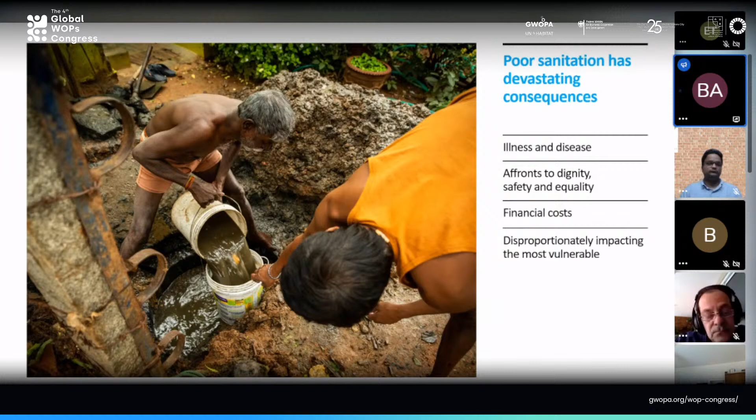So these are just some of the tips I want to share with you for us to think through, especially when we are planning. We must plan holistically. We must include all segments of society in our services, and we must ensure that we provide a service that takes care of everybody.

Again, maybe some of us have seen this. It's not just about toilets. We are talking about the sanitation service chain. We're talking about safety. For us to enjoy the outcome of urban sanitation services, safety becomes so important—safety from the point of containment up to treatment and reuse. We must ensure safety along the line. Excreta, feces, shit as we call it, should not be exposed to human beings or to the environment. That is safety. So along the service chain, we must put in systems and mechanisms to ensure that safety. That is extremely important.

Safe sanitation for all requires addressing the risks at every step, from the toilet to containment, storage and treatment, to conveyance, to treatment, to end use and disposal. Safety precautions, safety factors must be incorporated in design. I think that's extremely important.

I really want to end with my key messages because I know this is just to set the scene for discussions—I know our colleagues already have a lot of powerful slides they will show you. But if I'm to end with my slides, it's just for us to say that the world is alarmingly off track to deliver universal access to safe sanitation by 2030, and all efforts are required to accelerate progress. Poor sanitation has devastating consequences, and this impacts more on the most vulnerable population.

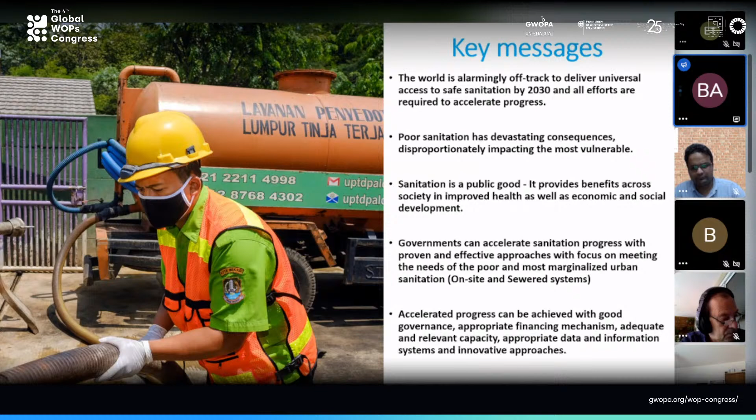Sanitation is a public good. It provides benefit across society in improved health as well as economic and social development. We believe governments have the political will to accelerate sanitation progress with proven and effective approaches which focus on meeting the needs of the poor and most marginalized urban sanitation, combining on-site and sewered systems. Accelerated progress can be achieved with good governance, appropriate financing mechanisms, adequate and relevant capacity, appropriate data and information systems, and innovative approaches. So I will end there, hopefully this will set the scene for our discussion.

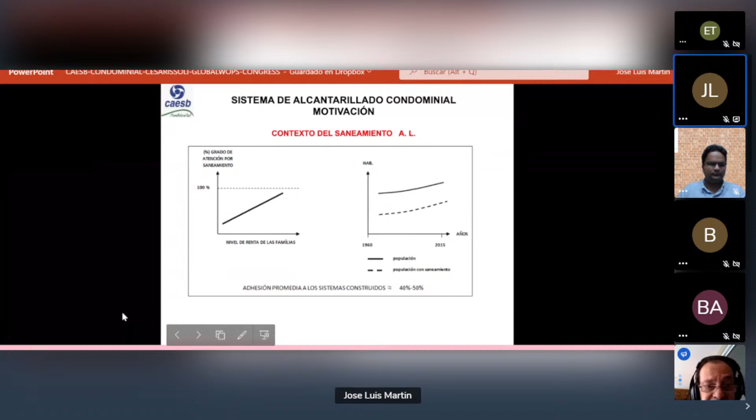Entonces, ¿cuál es el contexto de alcantarillado en América Latina? ¿Y cuál es la motivación de buscar una nueva alternativa? Aquí están gráficos esquemáticos solo para mirar la lógica de las cosas. El primer gráfico muestra el grado de atención por saneamiento en función del nivel de renta.

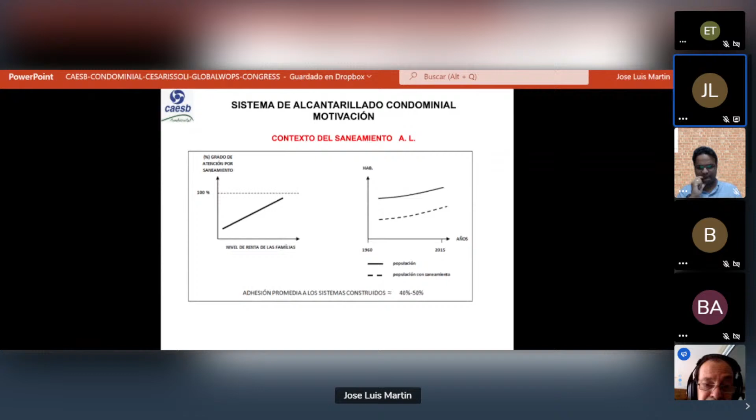Entonces, la lógica es siempre atender a los ricos, de quien hay plata. El segundo es un gráfico muy común en América Latina, por ejemplo este es de Brasil, donde las tasas de atención y de crecimiento de la población son paralelas. Nunca se logra la atención plena.

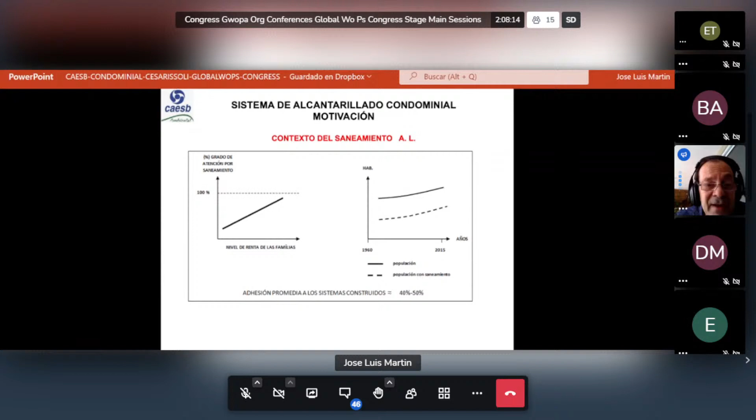Además de eso, en los sistemas implantados, solo cerca del 50% tiene conexión, adhesión de la gente. Entonces, esto es una falta de efectividad de la acción de saneamiento.

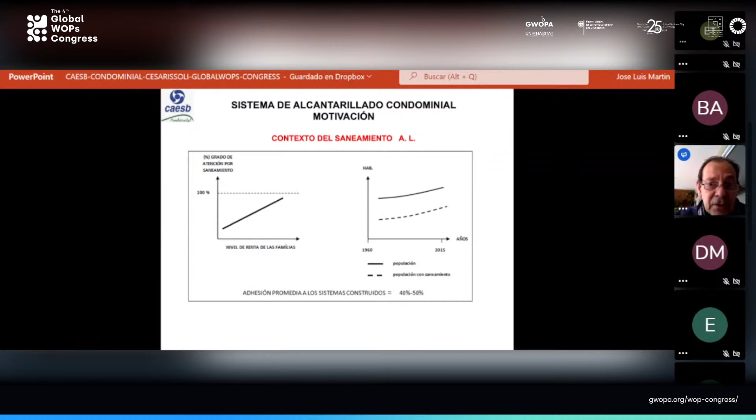¿Y cuáles son las causas? La primera es el trazado estándar de la red, que maximiza los costos, queda caro y lleva a desatención. El segundo es que no involucra a la gente.

También se tiene como consecuencia una inercia que también lleva a la no conexión. Y la tercera es la lógica de implantación, que no logra atención para los pobres, que son la mayoría en nuestros países.

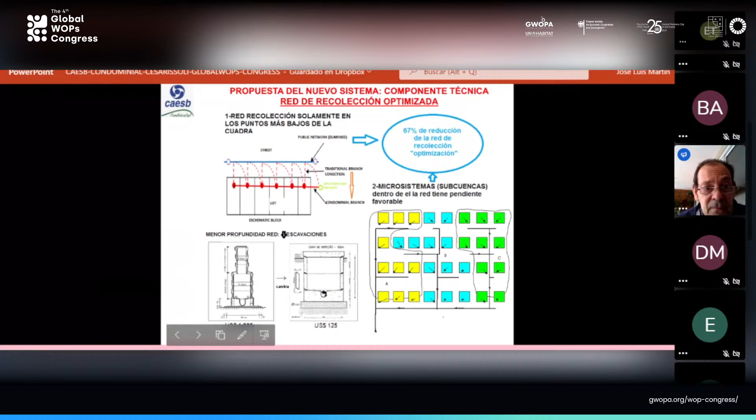Se reemplazan las conexiones hacia su vecino, no hacia el frente de la calle, sino hacia su vecino. Se transforma el conjunto de conexiones en un ramal condominial. Entonces, solo se necesita la red pública, el colector, en el punto más bajo de la manzana. Se optimiza la red, que ya no pasa por toda la calle, se reduce la red pública en 2/3, quedando solo 1/3.

Además de eso, se traslada la red pública a las aceras y áreas protegidas. Entonces se pueden cambiar los buzones grandes y caros por pequeñas cajas de paso. Así se profundiza la reducción de costos.

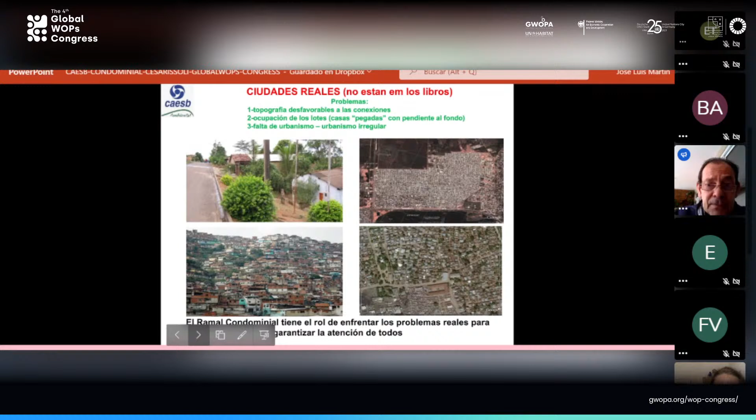Entonces, ¿cuál es el problema principal? Es la calidad de los proyectos y de la concepción. En la práctica convencional, lo que se hace normalmente es utilizar la norma técnica, la pendiente, la atención tentativa y la legislación, solo para el proyecto. Entonces, en el sistema de recolección, si no hay atención a la vivienda, el problema es de la gente. No se mira lo que existe. ¿Por qué? La legislación garantiza al proyectista que él siempre tiene la razón, aunque no mire la realidad.

En el caso del condominial, además de la norma y la legislación, miramos lo que existe, la condición de todo el sistema, la instalación existente. Entonces, aquí hay una obligación de atención a todos. Esta es una forma muy distinta de proyectar. Hay más trabajo, pero esta es la función del sistema. Toda vivienda se garantiza ahí, y hay un contacto muy fuerte, por eso, con los usuarios.

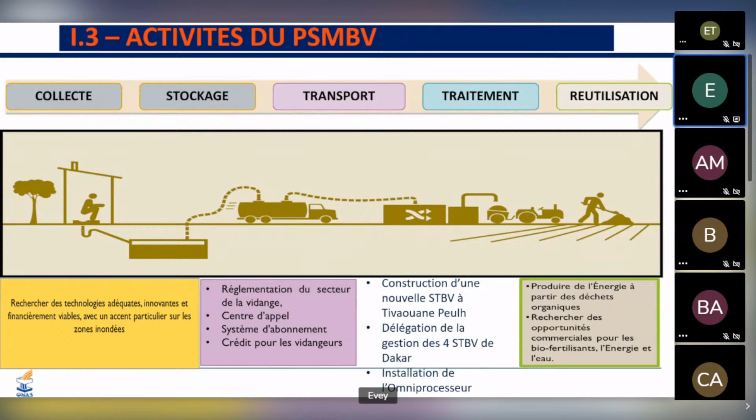Le centre d'appel a été mis en place et le bilan a été satisfaisant parce que ça a permis de baisser substantiellement le coût de la vidange.

La composante marketing, donc c'est toujours le centre d'appel qui rapproche les ménages et les vidangeurs avec la vidange mécanique.

La composante infrastructure: nous avons délégué 9 stations de traitement de vidange à Delvic, la société privée qui a gagné l'appel d'offres pour l'opérationnalisation, l'exploitation et la maintenance de ces stations.

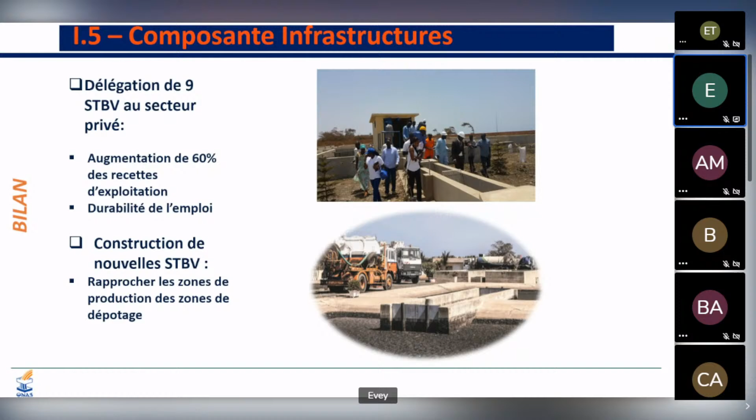Pour les toilettes dans les zones inondées et inondables, nous avons expérimenté 3 types de toilettes: le biofilcom, le biofilter et l'Earth Auger. Chaque toilette a pu donner satisfaction avec des systèmes qui permettent de traiter les boues sur place et de récupérer l'effluent dans des quartiers réputés être des zones inondables dans la banlieue de Dakar.

On a essayé de mettre en place un plan d'affaires en fournissant un paquet socio-économique de base aux populations, basé sur des toilettes, une offre incluant l'assurance santé et le bonus crédit téléphonique. Nous avons expérimenté ça.

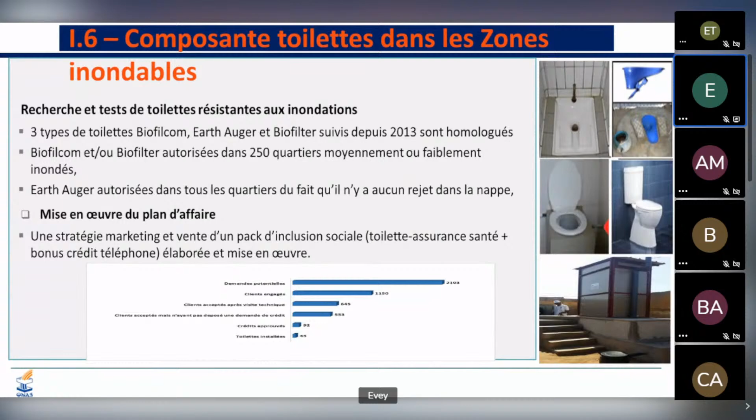Pour la composante recherche énergie, nous avons expérimenté depuis 2015, sur financement avec un don de la Fondation Gates, l'omniprocesseur version 1 qui permet d'incinérer 12,3 mètres cubes de boue de vidange par jour, de produire de l'électricité pour une puissance instantanée de 150 kW, de produire de l'eau distillée pour une quantité de 11 mètres cubes par jour, et de produire de la cendre pour une quantité d'1 tonne par jour.

Les résultats obtenus: la production d'énergie à 40%, et la production d'eau distillée comme coolant pour refroidir les moteurs de véhicules, avec un certificat de l'université Cheikh Anta Diop de Dakar.

La production de cendre utilisable à hauteur de 40% pour substituer le ciment dans la fabrication de pavés, ce qui a été certifié par l'université Cheikh Anta Diop de Dakar.

La production de cendre utilisable à hauteur de 15% pour la fabrication d'un engrais organominéral certifié par l'Institut sénégalais de recherche agricole.

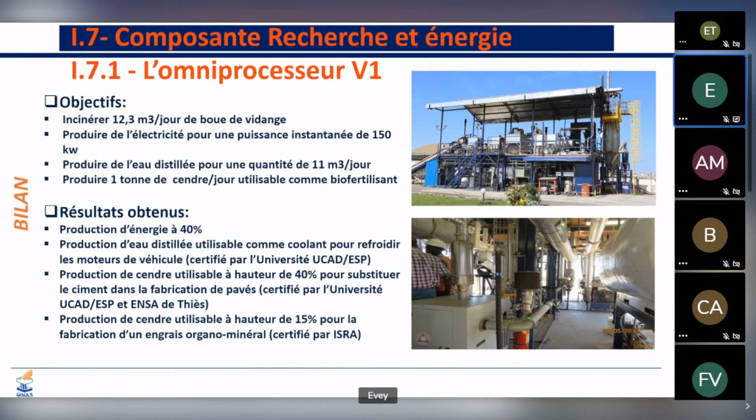L'omniprocesseur V2 est en expérimentation au niveau de la STBV à Dakar, à Tivaouane-Peulh. Il peut incinérer 3 fois plus de boue, produire 2 fois plus d'électricité, 2 fois plus d'eau distillée et 2 fois plus de cendre que l'omniprocesseur V1.

Nous avons l'omnidigesteur qui permet de transformer la boue en 25% de boue de vidange et 75% d'eau obtenue par membrane d'ultrafiltration. On élimine les germes pathogènes totalement avec cette technologie. On réduit aussi le nombre de lits de séchage, ce qui permet d'avoir un traitement intensif dans des villes où il y a des problèmes de disponibilité d'espace pour installer des lits de séchage et des STBV qui demandent beaucoup d'espace.

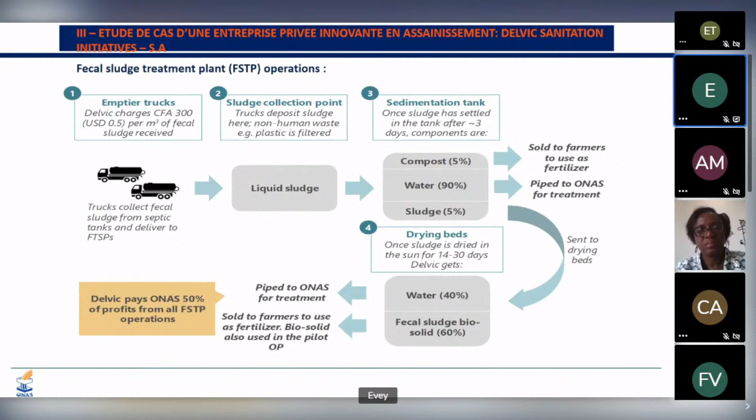Je vous remercie de votre attention. Merci beaucoup, c'est le dernier slide.

Thank you very much, Mohamedou, for that. I think a few things you've highlighted are the role the government has played through ONAS in creating an enabling environment for both the private sector and for consumers, making it easier for them to access services. That is critical when we talk about citywide inclusive sanitation.

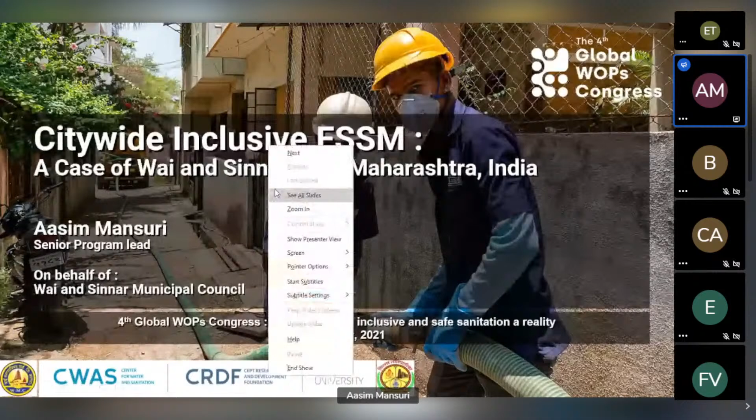Hello, everyone. Good morning, good afternoon, and good evening to one and all from the different parts of the world. Today we are going to talk about this concept of citywide inclusive sanitation, how these 2 cities, Wai and Sinnar, and to some of the questions that Gessi and Dennis raised, how cities can actually implement citywide inclusive sanitation, will be answered in this presentation.

So we are going to talk about these cities of Wai and Sinnar. This presentation I'm making on behalf of the cities. Unfortunately, they could not join, but I'm making this on behalf of them and the team that has worked, the Center for Water and Sanitation team that has worked on this project and made this happen along with the city.

The other city, Sinnar, is a fast-growing town, again on the western side of India, but a fast-growing industrial town, with a population of around 73,000. Now, the point to highlight here is that this population may sound a little smaller to all of you, in the range of 50,000 to 1 lakh population, but these cities are representative of 4,000 plus small and medium cities in India. So that's a huge number. Whatever we are able to do in these 2 cities can be replicated in India in these 4,000 cities, as well as in small and medium towns of Southeast Asia.

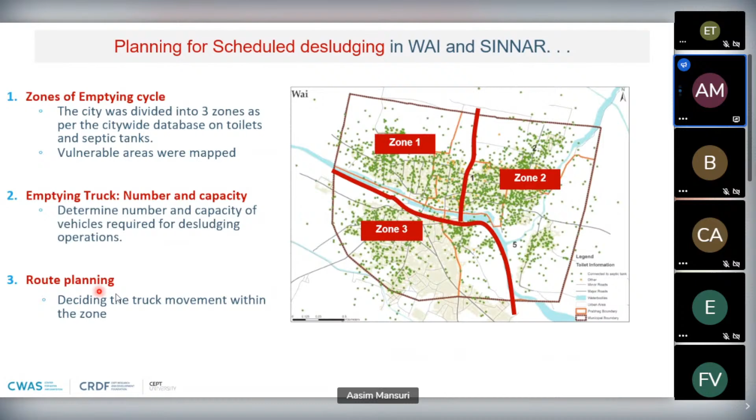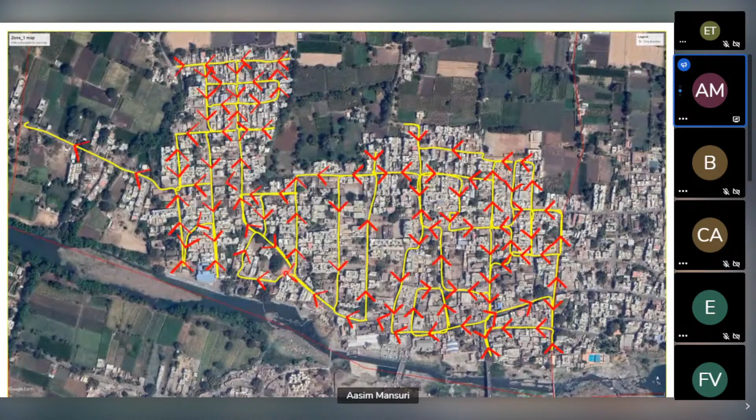This is a simple example of zone 1. Route planning was done this way for the whole city, and the private sector involved in this activity followed this route in consultation with the city government. Both cities, Wai and Sinnar, had resolved to involve the private sector, but at that time they had raised two concerns.

One concern was from the local government: they did not want to pay the private sector if they were not performing. To resolve that challenge, the city floated a performance-based annuity, performance-linked contract, wherein payment is made based on the performance of the private sector.

For example, under this contract for Wai, they had to desludge 6,000 septic tanks over 3 years, so annually around 2,000. If the private sector only desludged 70% of the tanks, they were only paid for 70% of the contract value, not the full 100%. That was from the local government side.

But there were also challenges raised by the private sector, for example, delayed payments, which is true across the world. So how do you redress that problem? This local government did, for the first time in India, an escrow agreement as part of the contract, between the local government, the private sector, and the local bank, a tripartite agreement where the local government agreed to retain 3 months of balance payment in that account to pay the private sector once bills are raised.

For example, if the private sector was to be paid $20,000 a month, this account will always have $60,000 to pay to the private sector. In that way, the delayed payment risk was resolved for the private sector.

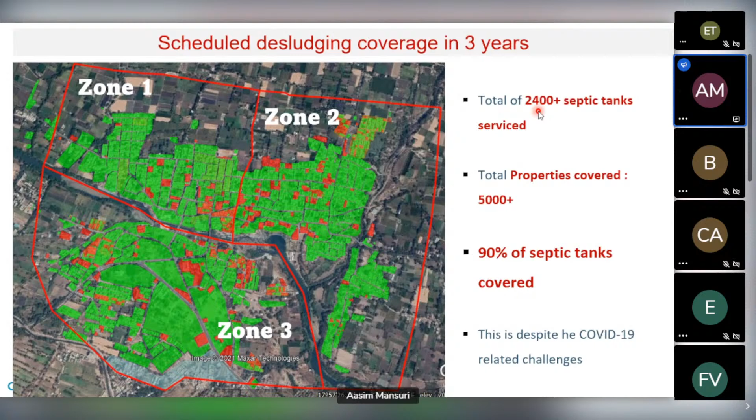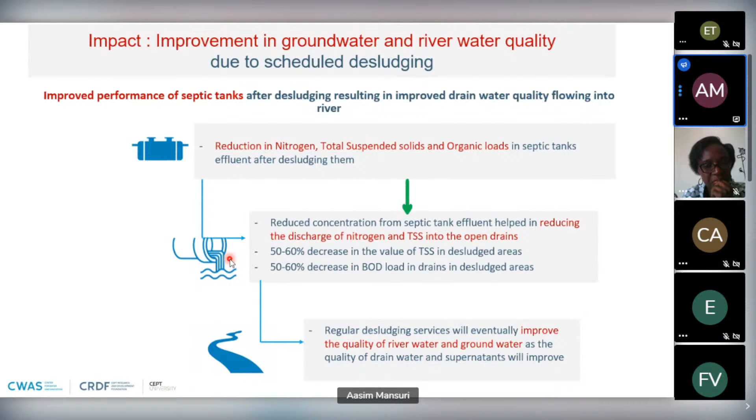Apart from the inclusivity aspect, it's important to highlight that due to scheduled desludging, there were also improvements in the ground and river water quality. As the septic tanks were being desludged more regularly, the effluent coming out of the septic tanks had better quality. It was still not the best, but better than before, as solids were not coming out. Due to this, the effluent flowing in drains and ultimately going into the river improved the quality of the river and groundwater.

There were FSTPs set up through local government funds. These FSTPs were solar powered, and all the treated wastewater from these FSTPs, as you can see in the photographs, was reused at the site for doing landscaping and urban forest. It was created as a resource center so that people can come and visit and learn about the activities the city has done.

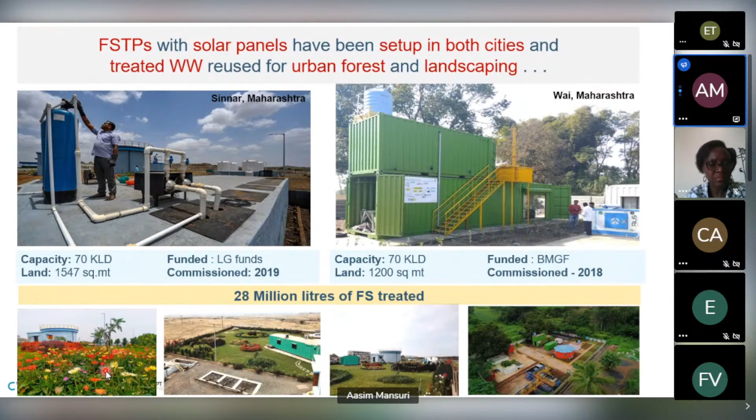Awareness generation was one of the key reasons due to which there was success, and people were able to highlight and even understand why there is a need to do scheduled desludging services.

IT-based monitoring systems like Sanitab and Sanitrack, which is like an Amazon app that we all have - once a service is provided, a signature-based app is used to monitor the end-to-end FSM services, and this is being monitored through dashboards. It also monitors whether slum households have been covered through these mechanisms and scheduled services. Very important, when we talk about inclusivity, it's about taking everyone together.

We saw a very potential role of engaging with women for providing this FSM service delivery. Along with the local government in Maharashtra, the state where we work, there is 50% representation of women in the elected bodies. So we did capacity building workshops with them to build their capacity on FSM.

We celebrated women champions, sensitizing women at households, because when the desludging service was being provided, there were women at home, and we built their capacities along with the city to make them understand the need for desludging services. This resource, the FSTP Resource Center in Sinnar, where the treated wastewater is used, is managed by the self-help women's group in these cities. This is the way we engage with women.

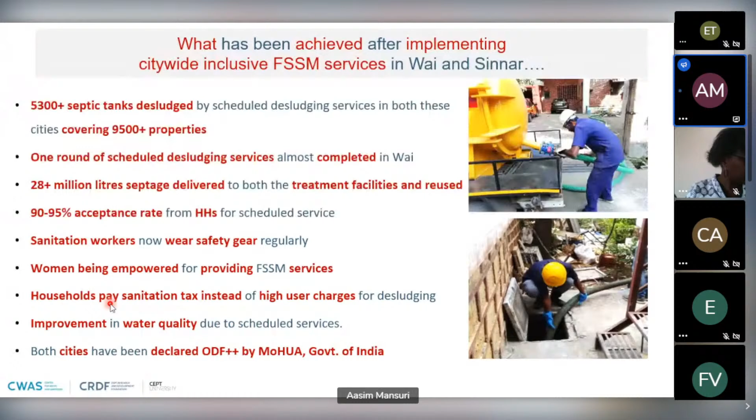Just to conclude, what the city has been able to attain as a public service: 5,300 septic tanks have been desludged in those towns. 28 million liters of septage has been treated, with a 90-95% acceptance rate for scheduled services. Women are being empowered, and households are now paying a sanitation tax as part of property tax to get this service once every 3 years. Both cities have sustained the status of ODF++, which is one of the certifications as per the Government of India.

It's important that we do pilots and then scale this up, as that has been our experience. We have been scaling up these learnings at Maharashtra level, working through policies and guidelines, as well as at national level, and tools have been prepared so they can be widely used by other cities in India as well as other countries.

Last but not least, it's important to acknowledge that this has only happened due to partnerships and collaboration. We are thankful to our funders, the Bill and Melinda Gates Foundation and HSBC, as well as our city and state partners, the local government and state government, and the NFSSM Alliance, an alliance of 30 sector partners working at national level to scale up fecal sludge and septage management in India. We'd like to thank all of them.

Thanks. And if anyone has any queries or wants to visit our website, most of these materials are available there, or you can write to us. Thank you. Thank you very much, Asim.

I do apologize for moving you quickly, but we do want to bring in the other two presentations, so please hold your questions for Asim, we will have a discussion in the plenary. We are going to move from the utility level, telling us about the sanitation value chain and how it is perceived by people working in that space, and move to the WOP.

How can we build the capacity to meet the sanitation challenge through peer-to-peer learning? We have two guests, and we will start with Mohammed Homeidan.

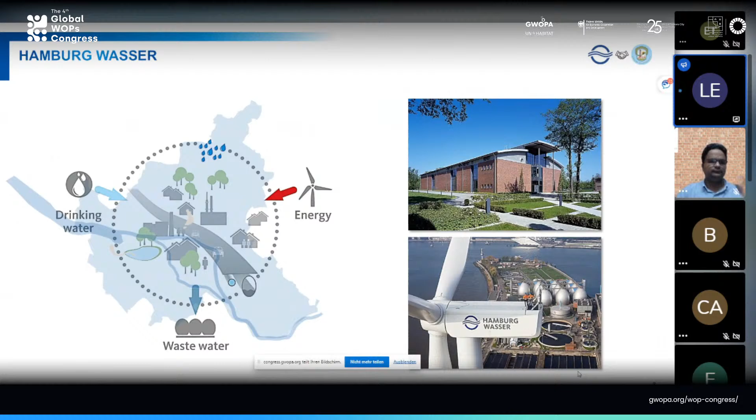So we do fermentation of our wastewater sludge, and that is what Mohammed and his colleagues in Nablus are also doing. We are generating energy from the sludge, and we are fully energy autarkic - we don't need any energy from outside. The wastewater treatment plant produces the energy it needs.

Hamburg Wasser also has a small project of decentral wastewater treatment, a separation of the wastewater streams. We have vacuum toilets, and a decentral treatment of the wastewater, and we also make biogas from it in a combined heat and power plant. We use the energy to produce heating. And with this, I already hand over to Mohammed.

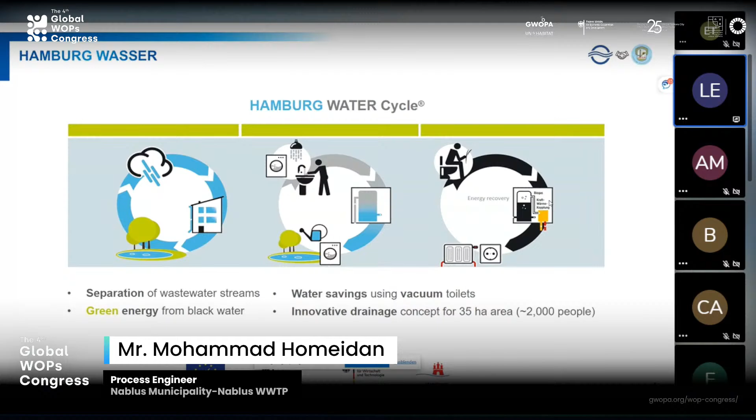Thank you, Lucatina. Thank you, Barbara, for the introduction. I'm really happy to be here in this session. From Hamburg Wasser, from the big plant in Hamburg, to the small plant in Nablus, which is really doing very well in treatment performance. Now we are talking about Nablus wastewater treatment plant, and in the future we will have Nablus East - these depend on the catchment of Nablus city.

And in the years of operation, it has improved to have a CHP plant. What I want to say here is that it was one of the challenges, really, in Nablus and in Palestine, that we have the first anaerobic digester.

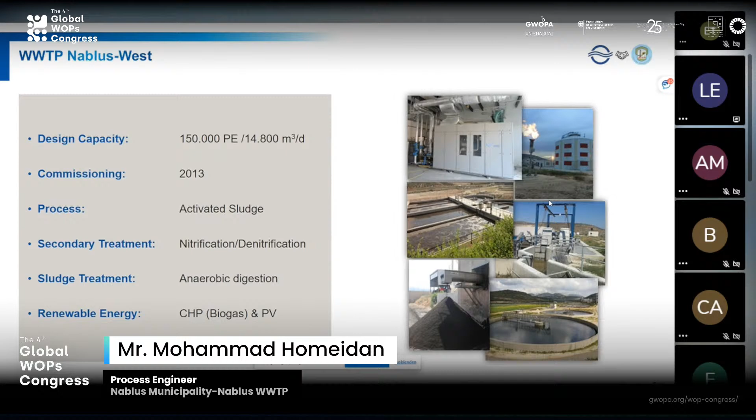I was remembering all the negotiations during the design phase about whether we, as the operator in Nablus city and in Palestine, could handle the operation of an anaerobic digester. At that time it was an issue. But now we have the first anaerobic digester in Palestine, in West Bank and Gaza, and it is well operated.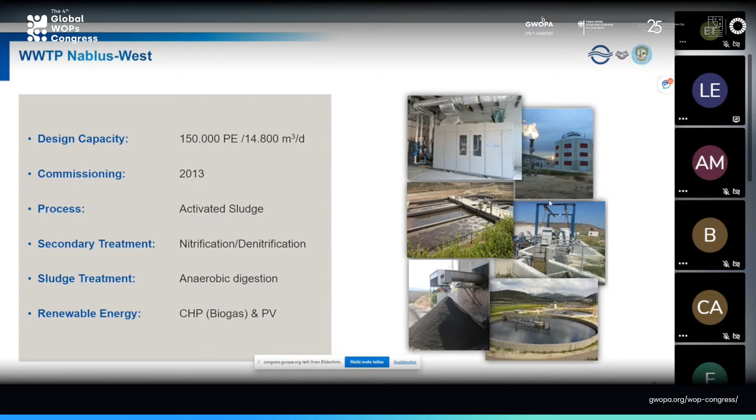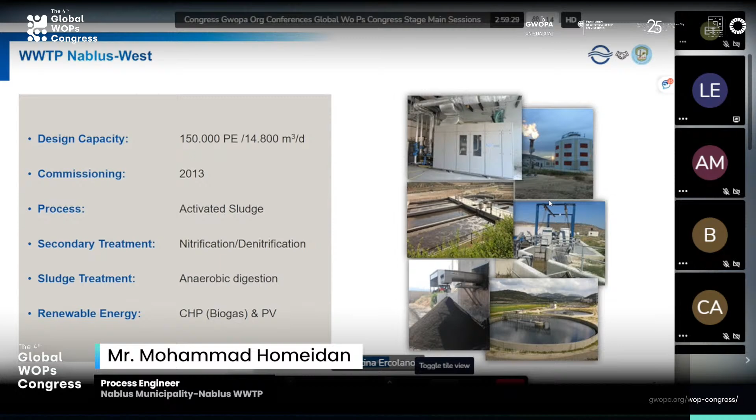In this slide we can see some pictures from the treatment plant. It depicts the effluent water on the right hand side, the PV panels, and also the anaerobic digester, which I talked about, in the middle picture.

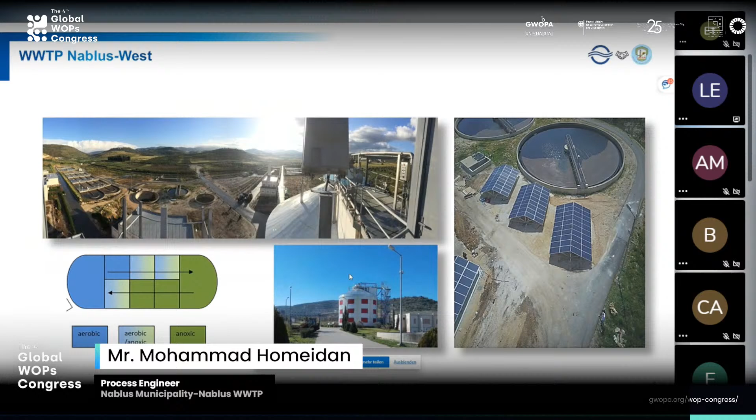Now with Luca. Luca? Lucatina, are you there? Thank you very much, Mohammed. Can you hear me? Yes, we can.

Thank you, sorry. I'll start with some facts of our cooperation. We already started working together during 2013. So when this beautiful plant in Nablus West was commissioned, some experienced people from Hamburg came to live in Nablus for a longer time. They were permanently on site and assisted Mohammed and his colleagues to make a very good commissioning and to take over the plant from the manufacturer that built it.

There were also short-term missions from other people in Hamburg. For example, we have experienced electricians who know about the SCADA system, and they came for maybe 2 or 3 weeks to help in a certain area.

What was really nice is that the colleagues from Nablus came to Hamburg for several weeks to stay with us. It's always been a pleasure to have you here, and the people from Nablus could experience how it's done in Hamburg, and we also came to Nablus to see how it's done there.

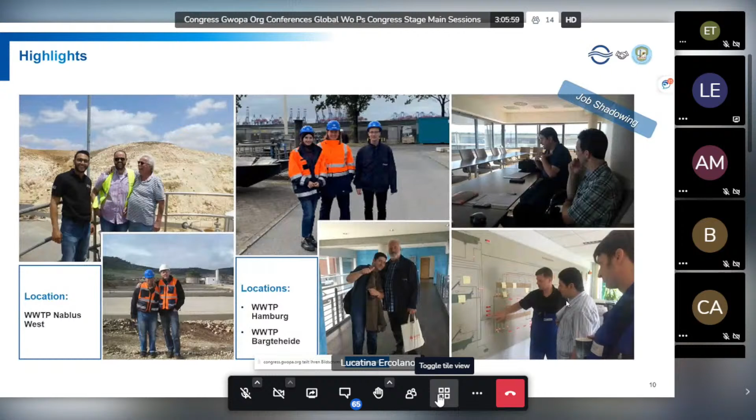Here we have some pictures of memories between us and Hamburg Wasser and Consulaqua. I would like to appoint the left picture for our expert, Karsten Schuya. He passed away 3 years ago, and we are standing for him, as a respect for this guy who really helped us many times. He was our father on training and our father on operation. I have to say that, because this is a true sentence about this man.

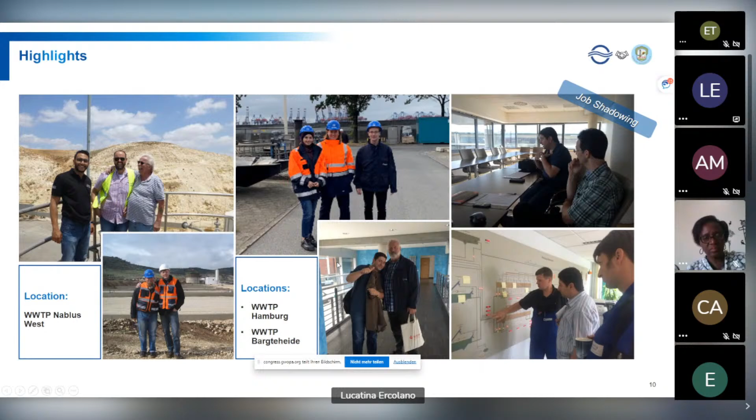And in another picture, we can see our chief operator with many job shadowing travels in Germany. Now look at the next slide. Thank you, grazie, Mohammed. I agree.

So the heart of this cooperation was Karsten Schuya, who passed away, and for me he serves as a model for many things. WOPs or cooperation is always about people, and he really was also for me like a father, showing me how to do things. Here we can see many other aspects.

Often people from Nablus come to us to visit. We could organize with a delegation on effluent standards from Palestine. We went to Italy because they are reusing the treated wastewater sludge in agriculture. As you have already heard, the Nablus West wastewater treatment plant effluent is already used, but now we are also thinking to use the sludge as a fertilizer. In this region, Milan of Italy, they are using the sludge as a fertilizer, mainly also for rice. They grow rice on it, and so we went there. Here you can see different things we already did together.

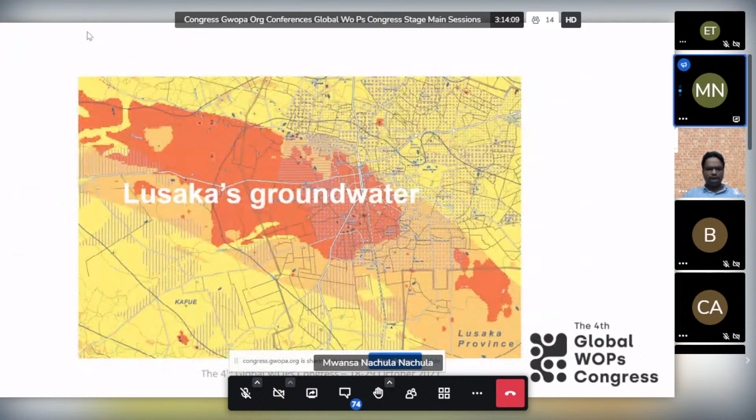I want to take you back. If you see the map where we've indicated pit latrines being utilized, and look at this map where the red or orange indicates vulnerable areas, you see there's a relationship, and most of our facilities that are not safe are actually constructed within regions where we have a high risk to underground water.

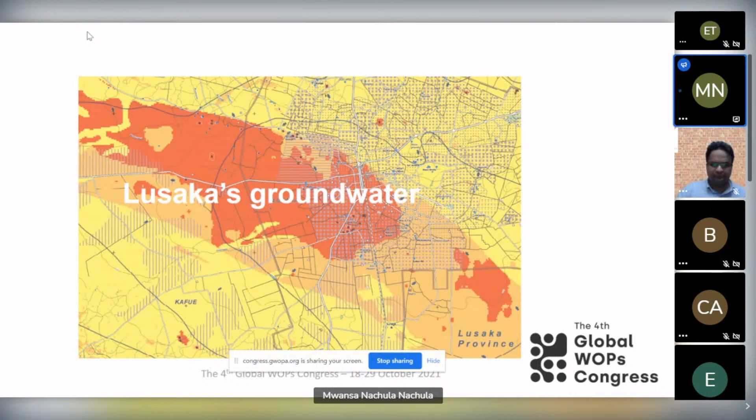Most importantly, also the fact that Lusaka Water, through our regulator, had a mandate expansion. Initially, and I think Dr. Mwanza related to this, our mandate has changed from sewerage to sanitation, meaning we needed to provide sanitation services to our low-income areas.

So based on the lessons we learned, as a utility we needed a strategy, like a policy guidance on how we're going to develop and operationalize on-site sanitation based on the lessons we learned.

Some of the challenges, as I've mentioned, is the fact that for Lusaka, it was a very different line of business because our mandate initially was to provide sanitation services on the sewerage aspect, and then also developing and strengthening a dedicated department. We had a low-income department, but it was more focused on providing water and sewerage services.

Although we had an aspect of providing services to low-income areas, because of the mandate, the utility's focus was not fully on this. But because of a change in regulation and the various partnerships and results coming from them, we had to ensure this is actualized in the utility, and also the regulator, because our services are regulated, it was also a new line for them to regulate on-site sanitation.

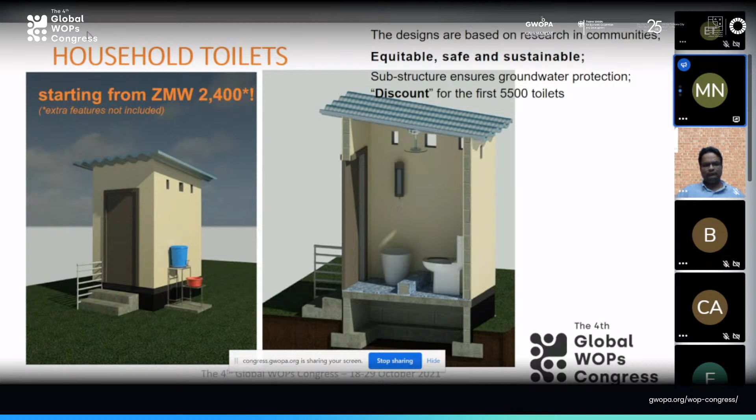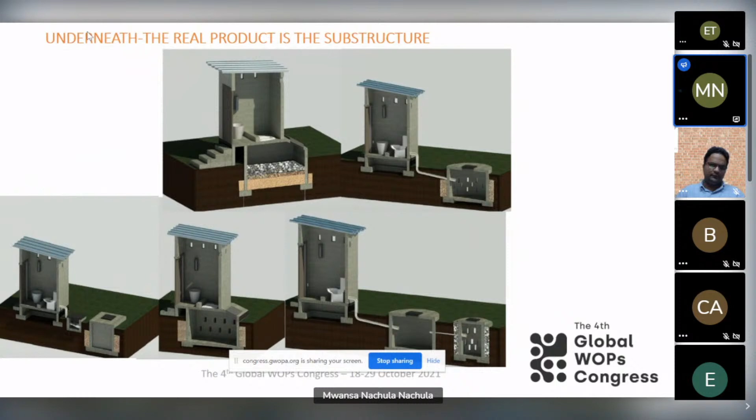Based on our policies, we thought it important to give the subsidy to what really concerns the utility versus what the participants, the customers, were interested in, which in this case was what they see based on the formative research we undertook. So the real product is really underneath, because we had to ensure we have a substructure that protects the underground water, a key commodity for Lusaka Water.

In terms of delivery mechanisms, based on lessons learned, mostly from Ghana as well as Kenya, previously as a utility we would build capacity in the communities, train them, and ask them to construct the toilets, with the hope that it would be scaled up.

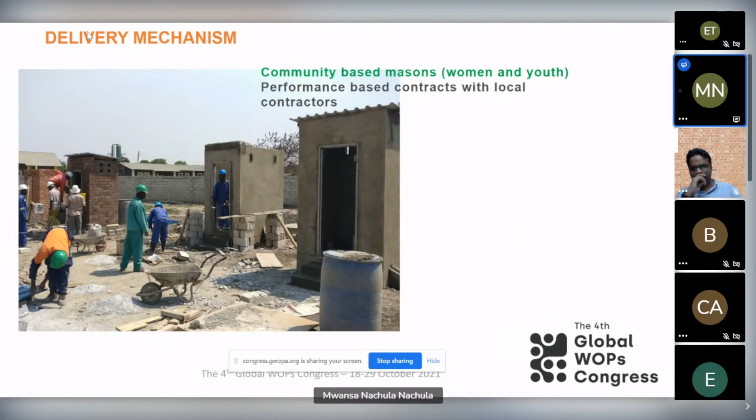Based on key lessons from our partnership and the mentee program, we had to look at alternatives. Right now we have two different contracting methods: community-based masons that we've trained to construct the facility based on our requirements, and local contractors that engage the local community to provide these facilities.

In terms of FSM, we've had very good lessons especially from Senegal and Kampala around how they engage private operators in pit emptying. In Lusaka, we have what we call performance-based contracts, defined through one that is technologically neutral, and another that is manual-based.

We thought it important to distinguish this, and based on key lessons learned from eThekwini, we needed to explore partnerships and the expertise that private operators have versus the utility. We conducted a market assessment, and it was clear that what we were lacking was the pit emptying market, which was not fully developed in Lusaka versus the septic tank market.

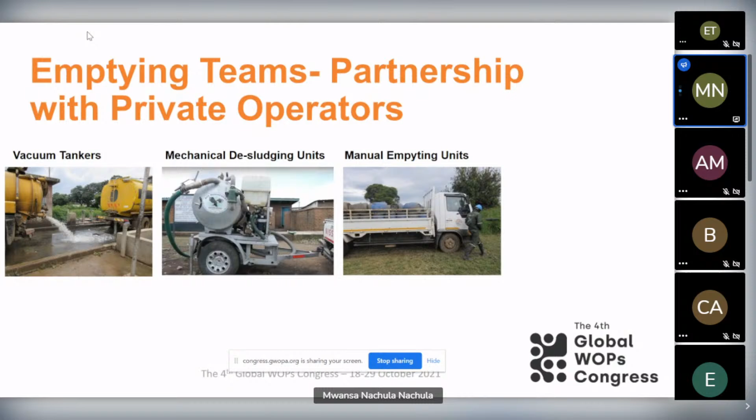For vacuum tankers, there's already a formal process established where private operators are licensed through our environmental regulator as well as the utility to empty sludge at our facilities, but we didn't have a formalized arrangement and partnership with regards to the pit latrines.

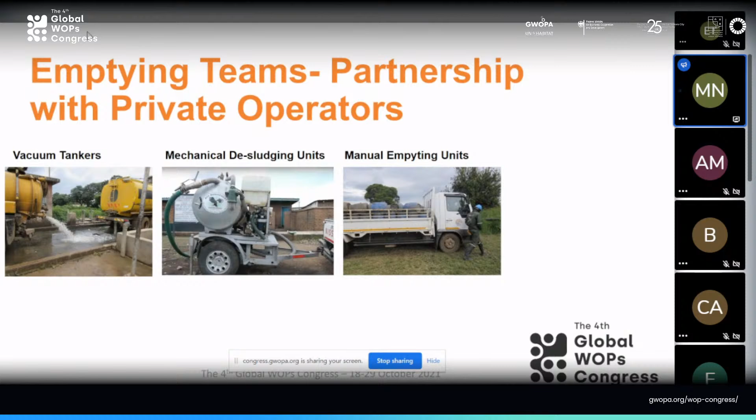From the market assessment, based on lessons learned especially from eThekwini, we had to come up with a way to entice and create a partnership with private operators to empty the pit latrines. We undercut the informal pit emptying by fixing a price to empty, which was below cost, and then provided a top-up service to the private operators.

We were mindful of the fact that these are private business people, and we needed to ensure we actually provide the finances to them as and when required, not following some of the delays that come with having public institutions involved.

So through this, we went to tender. We carried out a lot of trainings with the private operators to help them understand how to bid. They came up with various bidding prices, and the household fee, which is also subsidized, was provided. We made sure this goes to the private operators for their operational costs, and the top-up finance comes through our escrow account.

We also divided the city. This is something we learned about zoning, and as I alluded to earlier, we are currently doing on-demand, but it's very important that we move to scheduled desludging, especially with private sector involvement. These are lessons we've learned through our CWIS platform. We had to divide the city to allow these contracts to operate in different areas, and ensure no private operator had two or more contracts in one area, to increase efficiency as well as competition among private operators to stick to our standard operating procedures.